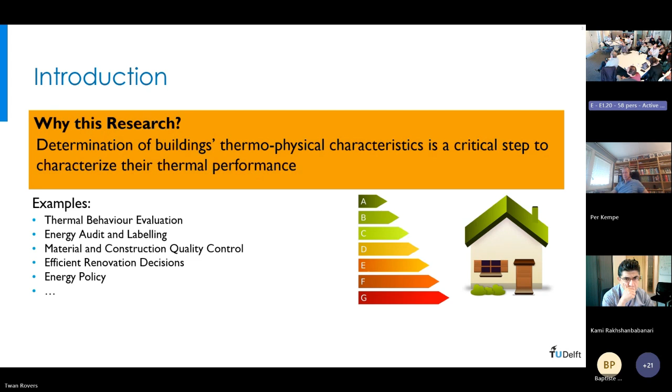Examples of this are thermal behavior evaluation in buildings. It's very important for energy audits, energy labeling, material construction and quality control, making efficient renovation decisions, energy policy, and many more applications.

So what's really important here—I cannot emphasize this more—measurements are super important. And in my experience, I want to emphasize the importance of in-situ measurements specifically.

It's really important to make in-situ measurements because it's really different when you do in-lab measurements or calculations versus in the field. Buildings perform differently than what you expect or measure in the lab. And that's a fact.

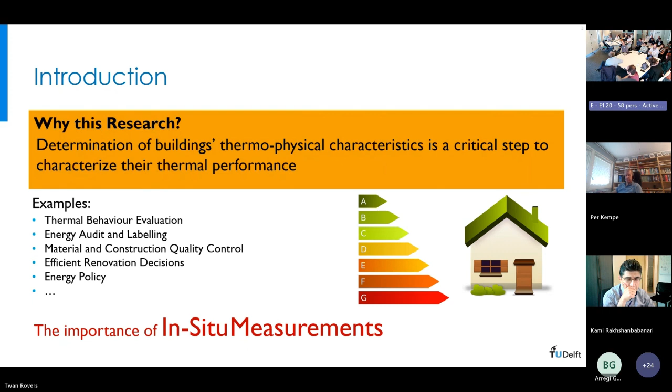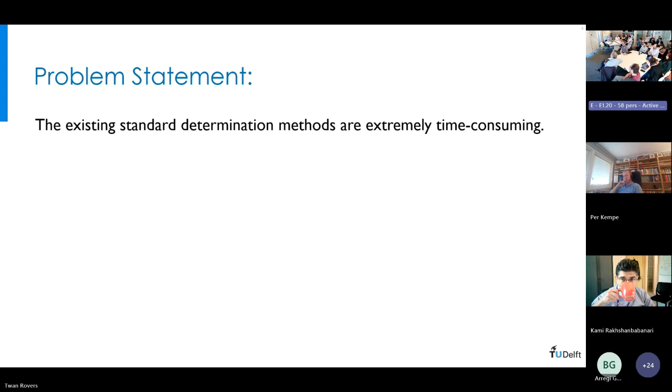So the problem with making measurements is that for building characteristics, sometimes the existing standard determination methods are extremely time-consuming and therefore not really practical.

For example, for thermal resistance and thermal transmittance evaluation, which was the main focus of my work, we have two standards: ISO 9869 and ASTM C1046 and ASTM C1155. These are the two standard methods widely used in the world.

Research has shown that these methods sometimes take up to two months of measurements.

So you can imagine you leave your sensor, the system, and have to come back in a month, weeks, or two months later. And they're subject to many constraints.

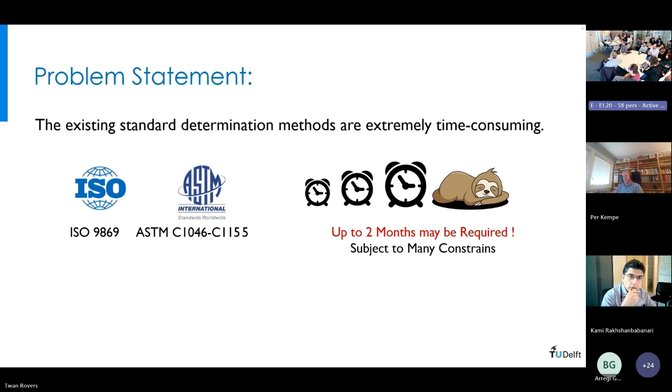So it makes sense that some parties want to totally skip this kind of measurement and rely on other values, such as calculated or estimated values.

So the aim of this research has been to develop, test, and validate new rapid, feasible in-situ methods to determine some of buildings' most important thermo-physical characteristics.

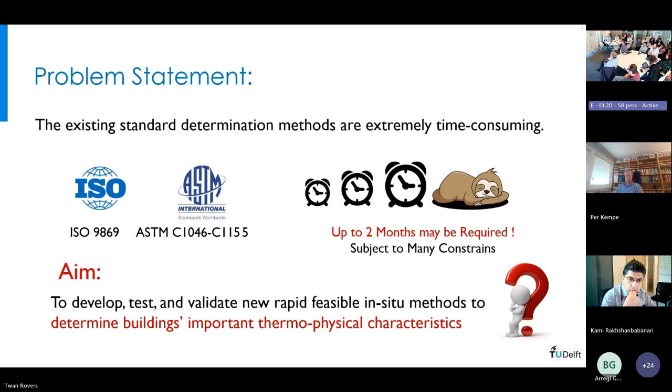We looked at this at two different scopes. One is the component level—meaning we looked at the wall, window, or door—and tried to improve the existing standard, because standards are still the most important as they are accepted by everyone.

So we have to invest in those. And at the other level, we started developing alternative methods other than the standard methods.

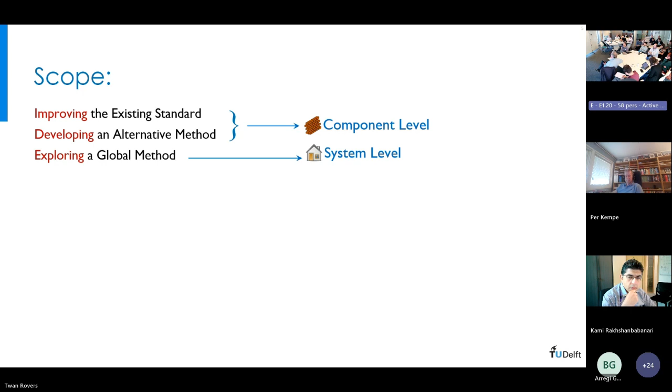Then we went to a larger scale: the system level, where we explored global methods, which I will explain in a bit.

At the component level, we look specifically at walls, and there we try to look at thermal resistance, thermal conductivity, and volumetric heat capacity. These three parameters are super important because from those you can calculate many other characteristics, such as thermal conductance, diffusivity, inertia, etc.

At the system level, we looked at parameters like heat loss coefficient, thermal capacitance, and air change rates. This is quite different from the component level because we have to globalize things.

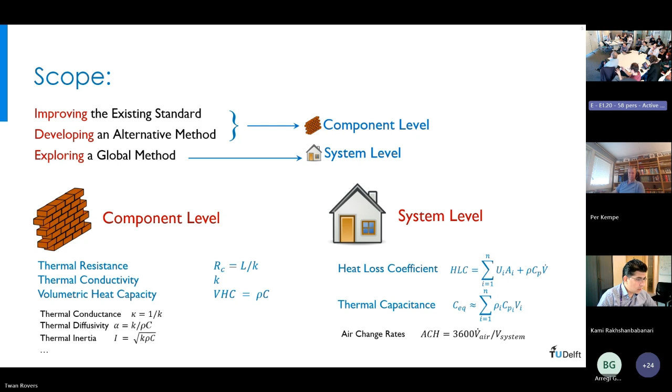Different researchers and different groups have different definitions of parameters based on what they want to find and what they want to reach.

So, to improve the existing standard method for finding the wall's thermal transmittance and thermal resistance—the U value and R value—the standard is to use a heat flux sensor and temperature sensors and follow the standard.

In this part, I suggested using an extra heat flux sensor in addition to the existing one.

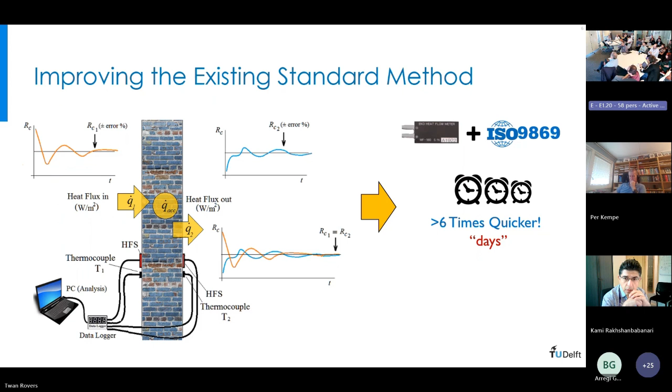And there I showed that we can reach the conclusion six times quicker. But still, this method takes days to finalize. So we address thermal resistance this way.

The advantage of this addition or extension to the standard method is that it's effortless. You don't need extra knowledge, you don't need to learn new analysis. It's still based on the standard method, so it's still acceptable by many people.

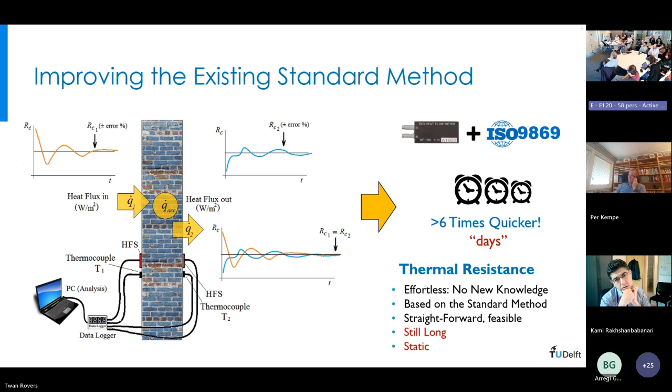It's very straightforward and feasible. The problem is that it is still too long, and it is also static, which means we cannot address the dynamic behavior of the buildings. So therefore, we started working on new methods.

The new method that we worked on, and I will explain a bit later, is relying on the theory of thermal response factors. This is a basic theory in heat transfer, which is very close to my heart because I've also been teaching it for 10 years at the university.

The theory suggests that if we excite one side of a wall with a triangular surface temperature pulse of 1 Kelvin, we get such heat flux profiles at the excitation side and the opposite side of the wall. This is very important. These heat fluxes are called response factors, in conjunction with the surface temperature pulse that is in the form of a triangle. That's very important because we use this to develop our method to determine buildings' thermo-physical characteristics.

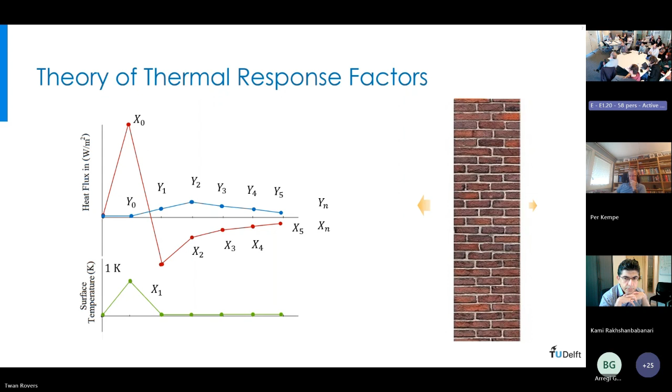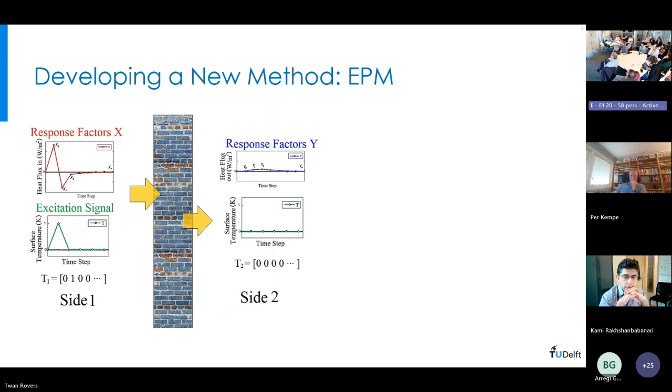So what did we do? We took this theory to real life. We applied it in real walls in the Netherlands, and we studied the performance of the walls based on this method that we developed.

We call this method the Excitation Pulse Method, EPM, and we did a patent on it because it was a new idea. With this method, compared to the previous method, which took days, we could do measurements 25 times faster. So in order of hours instead of days, we could find the thermal resistance of existing walls.

So we found thermal resistance with this method. It is quick and efficient. It was accurate and precise. It was dynamic, so we could address the dynamics of the walls. And it also gave us more information than just the RC value, which I will explain a bit later.

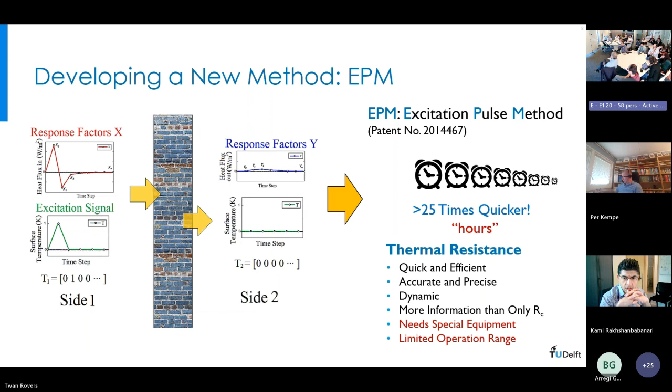The problem, though, is that it needs special equipment to perform this method. So you need some kind of equipment to perform this kind of test. And like any other method, it has a limited operation range.

So what we did, we took it further. We built a prototype and we studied different aspects of this method. We defined the properties of the walls.

In each step of development, what we did was study the method by building physics simulation, using software like COMSOL Multiphysics to address the heat transfer problems. And then we also did experiments. So it was a combination of experiments, simulations, computation, everything together. That's really important when you want to do scientific work: combine different methods, experimental methods, simulation methods, computational methods, and so on.

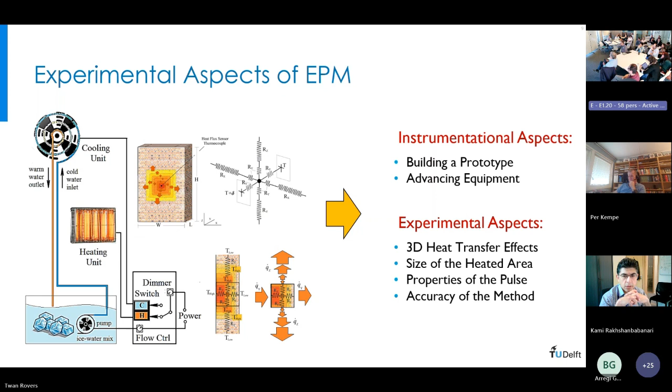So we advanced the equipment and we did some tests to study the experimental aspects, such as 3D heat transfer effects, size of the heated area, properties of the pulse, and accuracy of the method.

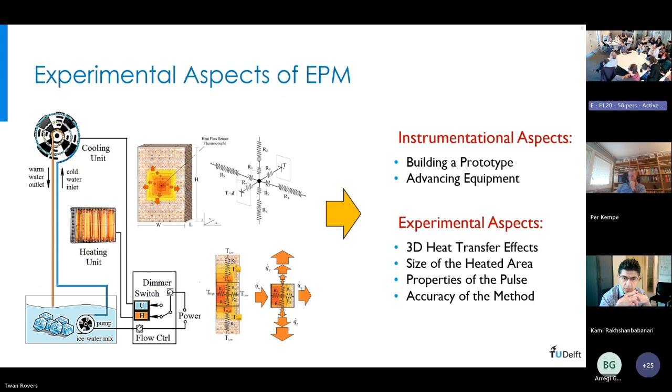What we could reach with this method further, by simulation, experiments, and computation, was the accuracy and precision of this method. And we applied this theory of response factor in real life. We studied the performance of the method in multi-layered walls.

That's always a question. What we found is that with this method, we could even find a kind of understanding about the possible wall composition, because sometimes you have multi-layer walls and you have no idea what's inside, because the wall is pretty old, maybe 100 years, maybe 800 years old. And with this method, we could kind of find the layers and the properties of what's inside.

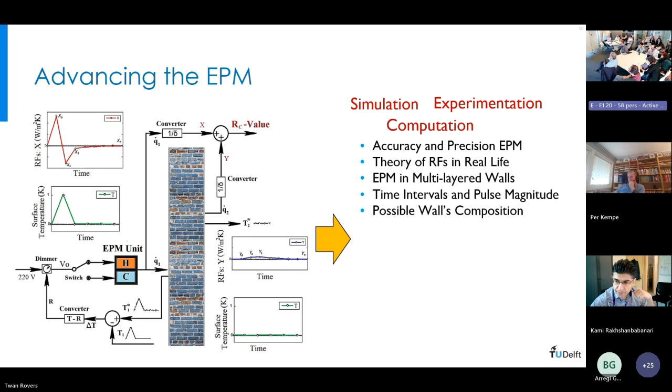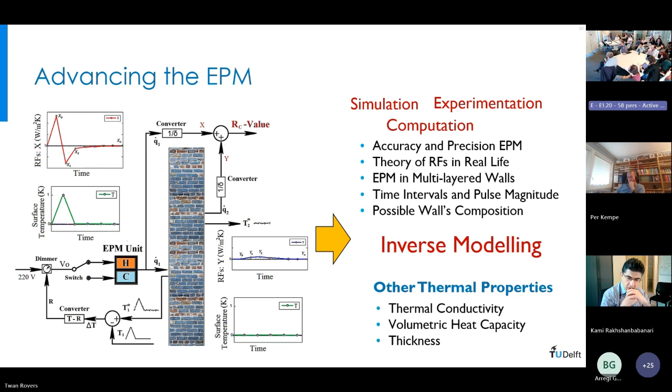So what we used further, when we advanced the method, was inverse modeling. And with inverse modeling, what we could find were other thermal properties with the same method. So previously, we looked at thermal resistance, and then we could find thermal conductivity and volumetric heat capacity and the thickness of the wall. So we could also address this individually.

So this was at the component level, and this was where I had the most interest, because you look at one component, it's easier to deal with, and you can go really in depth there. But that's not always feasible in real life.

We're dealing with hundreds of thousands or millions of buildings, and we cannot go to every building and look at every component. So let's find if we can do something else to address the problems in an easier and more user-friendly way. So then we look at global characteristics.

Instead of just looking at the window or a door, let's look at the whole house, the whole building. So what happens here is that instead of modeling a component, we model the whole building. But we have to be careful to make a simple model, because we want to use it easily.

Nowadays, some buildings are equipped with many sensors, like BMS, building management systems, and HVAC systems, especially if you go to places like a university, schools, or commercial buildings. There are many sensors installed to control the temperature, relative humidity, etc.

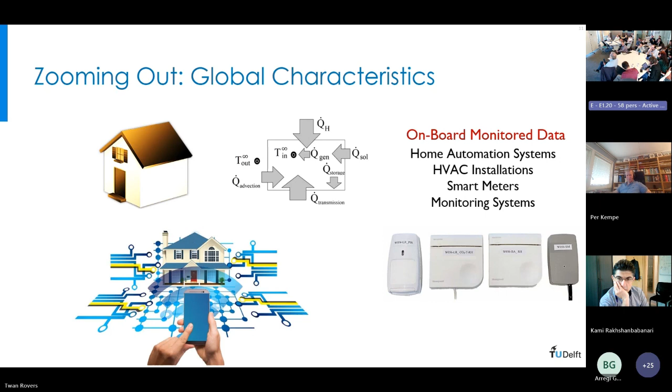And therefore, we can make use of this data. So what we did, we had a set of sensors, in total around 2,000 sensors, and we monitored 100 houses in the Netherlands using these sensors. We looked at parameters like air temperature, relative humidity, CO2, motion, energy, and so on. This data is normally called onboard monitoring data.

It's data that is already available from the existing home automation system, HVAC installations, smart meters, and monitoring systems. So what we did, we used inverse modeling, which was a very important part. These are examples of how you can model a building, a single building. Any heat transfer system can be analogized to an electric system, so a single house would be modeled in different ways in different electric circuits, depending on how you want to study and what you want to achieve.

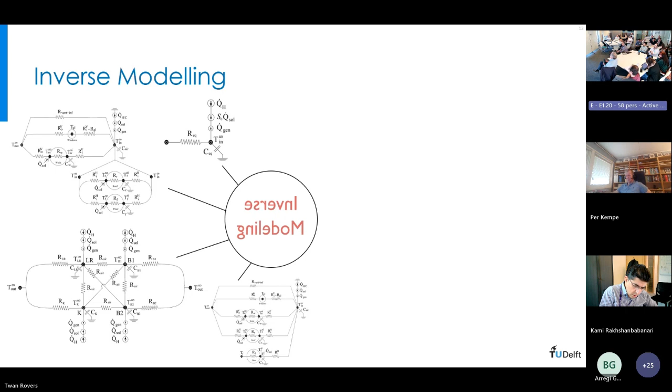So what we did, we used inverse modeling in a very simple model, and then we used a genetic algorithm to find some of the global characteristics of the building. This means we modeled the building as a series of a big resistor, a big capacitor, and a big ampere source. For example, solar radiance is a kind of power source.

So what we looked at was heat loss coefficient, global heat capacitance, solar fraction, and air exchange rates. These kinds of characteristics are different in different kinds of research because they come with different definitions and different purposes. In this kind of modeling, we have to be careful, because we always globalize and make a lot of assumptions in between that are not very accurate.

But the advantage is that it's at the building level, so we don't talk about one component anymore - we can talk about the whole building among many buildings. It's less intrusive, because sometimes you're really not welcome in people's houses with your equipment to do measurements in reality. In our case, we were welcome to go to 100 houses, but that was just by luck.

Then it comes at a lower cost, because your data comes mostly from existing sensors or very cheap sensors - not a lot of equipment. It's also less hassle, so you just collect the data and do the analysis. You rely on analysis rather than just the sensor, but of course you accept less accuracy at this level.

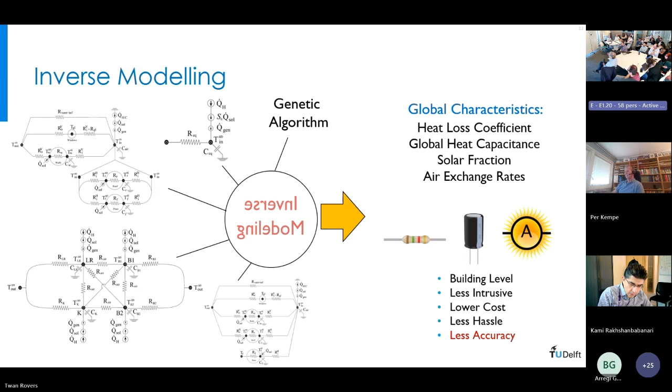To finalize - because I addressed different methods and different aspects of measurements, many people ask which method is best. What we found is that in-situ measurements are absolutely crucial. In one case, we found a 400% overestimation of the thermal transmittance that we could resolve by doing the measurements with our own EPM method.

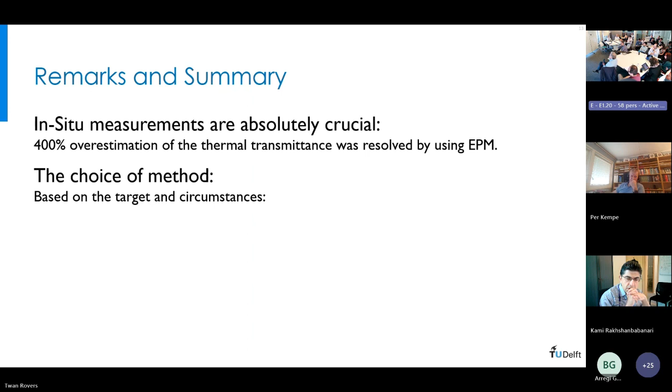So the choice of method - if you ask me after all these explanations of different methods and techniques, what is the best, there is no answer. It really depends on what you want to study, what you have at hand, and what you can afford. Based on target and circumstances, you can find the right choice of method.

For example, if you're in summer or winter period, if you have a large temperature gradient and standard equipment, and you're welcomed into people's houses, I really invite everyone to use the ISO 9869 extension, which is scientifically not the best method, but it's globally accepted. That's very important, because it makes it acceptable and welcome.

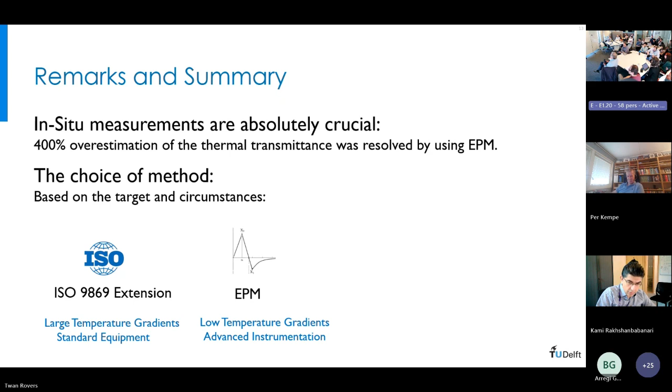Then if we don't have that, and we have low temperature gradients and access to advanced instrumentation, we could suggest using the EPM method. The patent is released and everybody can use it. We need to make a prototype with some advanced equipment and take the method further.

And finally, if you're not welcome in people's houses, if you cannot afford doing that kind of in-depth study at every component level, and you don't want to do real experiments, then it's best to use existing data and the global inverse modeling method - just take the data from the existing database or existing sensors and rely on heavy analysis rather than experiments.

This way, you cannot go really in depth, but you can compare multiple buildings. You can look at 100 houses and see if one or two of them are performing differently than the others, and then address those houses individually. That's the same as in any other industry - sometimes you don't want the real value, you just want to identify which one is good and which one is not.

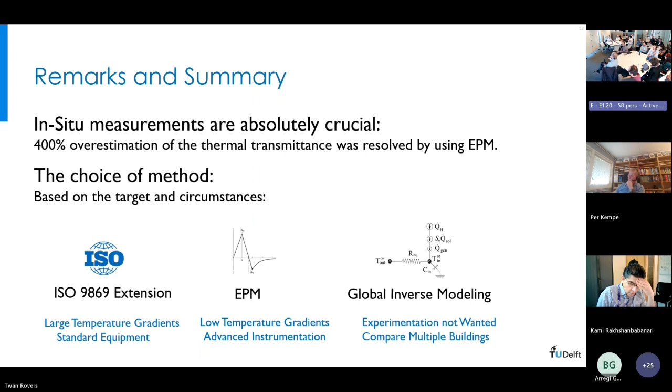So that was it. If you have any questions?

Yeah, I'll ask some questions at the lunch or coffee break, if you don't mind, Twan - we're a bit behind time. Okay, stick around for coffee. Yeah, that was very good - a subject very close to my heart, we'll be able to chat.